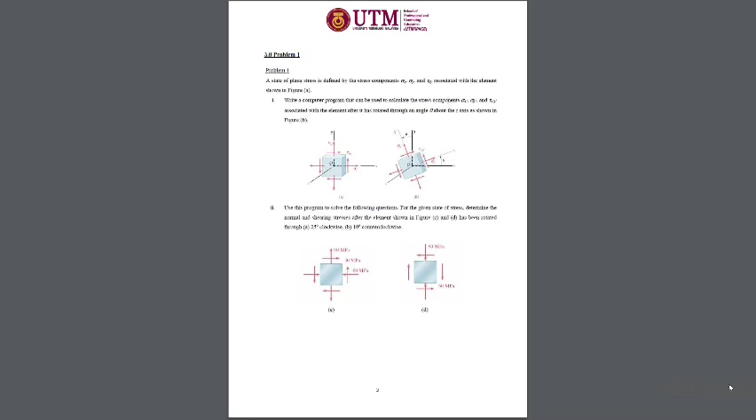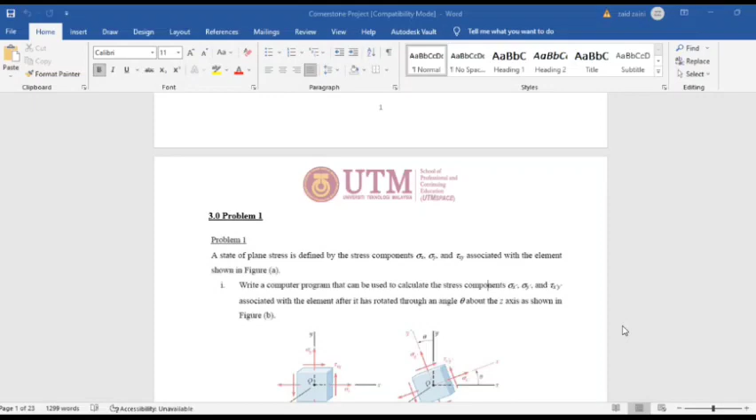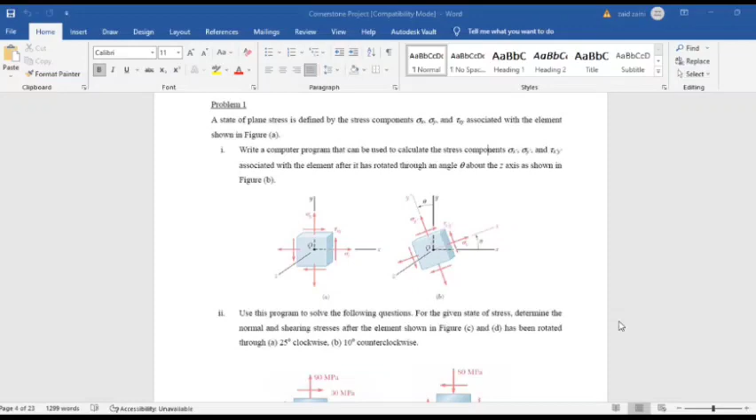Today I would like to present my part on the Cornerstone project in Mechanics of Solids 2. So my part is problem 1. The question is to write a computer program that can be used to calculate the stress components. So I used Octave to write a computer program. And the question is to use this program to solve the following question. This question gives the state of stress and angle. So I will show you how it is done on Octave.

So this is my programming. Let's run the program. Input the value of sigma x. Based on the question, sigma x is negative 60, sigma y 90, and the shear stress is 30. So just put negative 60, and sigma y 90, and the shear stress is 30, and the angle 25 clockwise. So 25 clockwise is the same as negative 25. So that is the answer.

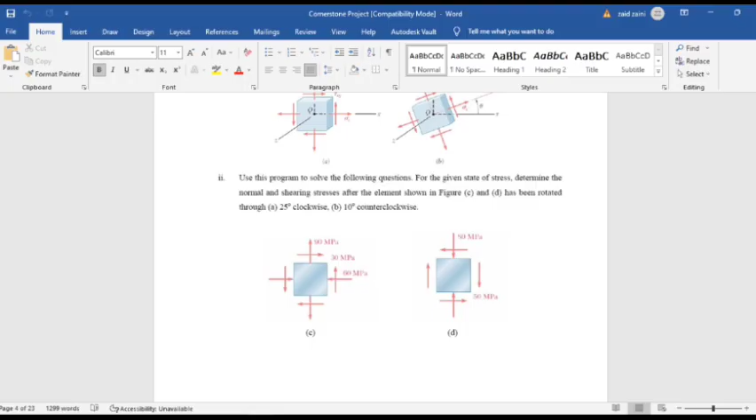I would like to show you a comparison with my manual calculation. Based on my manual calculation, I got negative 56.19 MPa for sigma, and the shear stress is negative 38. So if we compare to Octave, it's got the same answer. Let's continue to the second question. Sigma x is 0, sigma y is negative 80, and the shear stress is negative 50. Let's take a look.

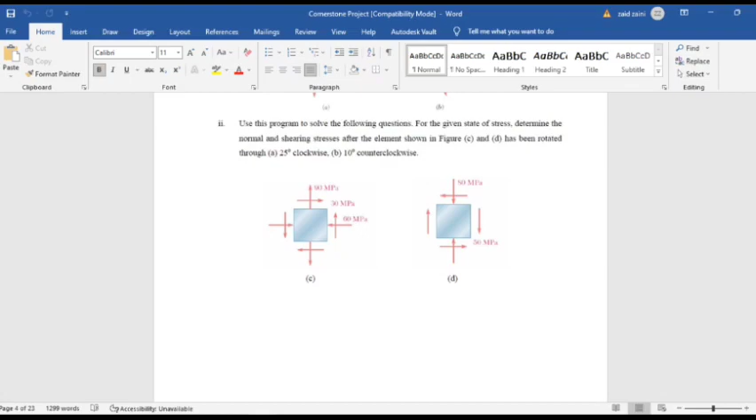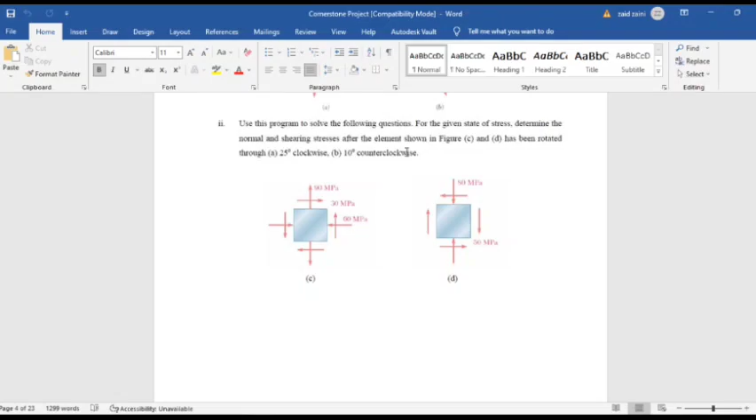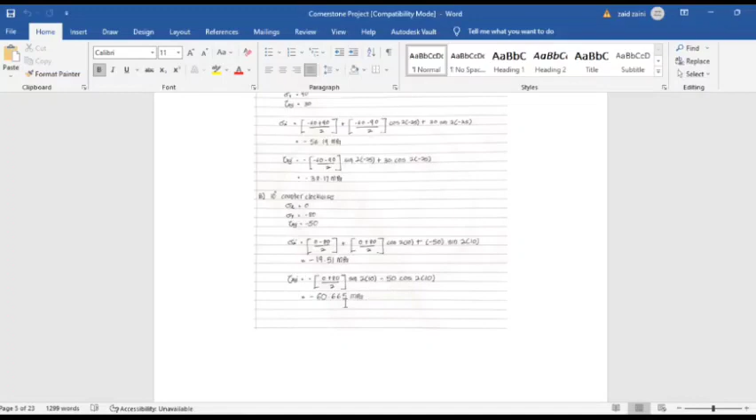So I run. Sigma x is 0, sigma y negative 80, and the shear stress is negative 50. Just put it, and the input is 10 degrees, so positive 10 degrees. And the answer is normal stress and shear stress. If we compare to my manual calculation, my manual calculation got negative 19.51 and negative 60.665. So let's take a look. Okay, so it's got the same answer.

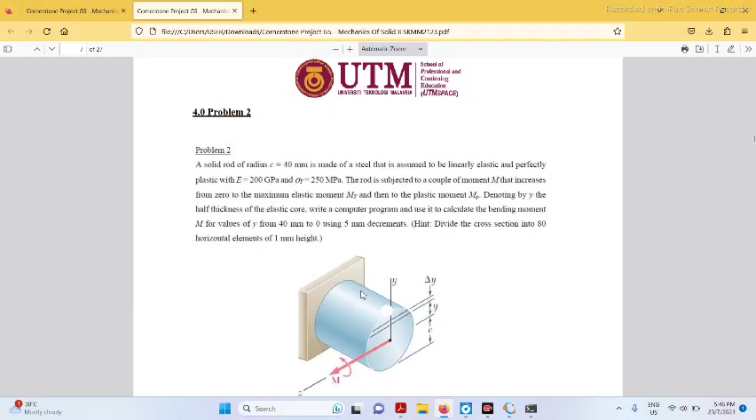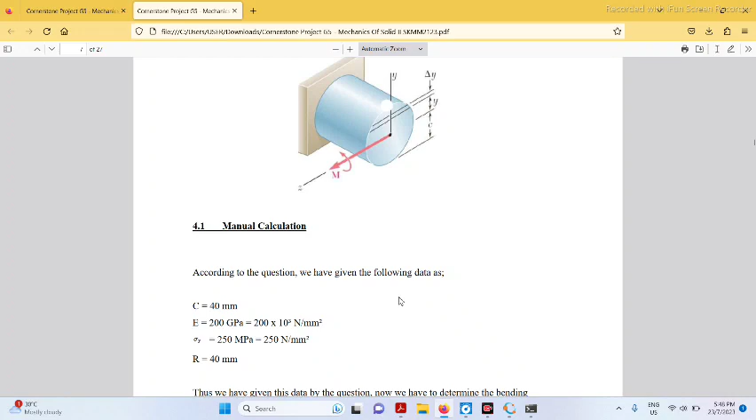Today I will present the Cornerstone project for Mechanics of Solids 2. I will solve problem 2, where this is the question and this is the picture. According to the question, we are given the following data: C equal to 40 mm, E 200 GPa, bending stress 250 MPa, R 40 mm. Thus, we are given this data by the question.

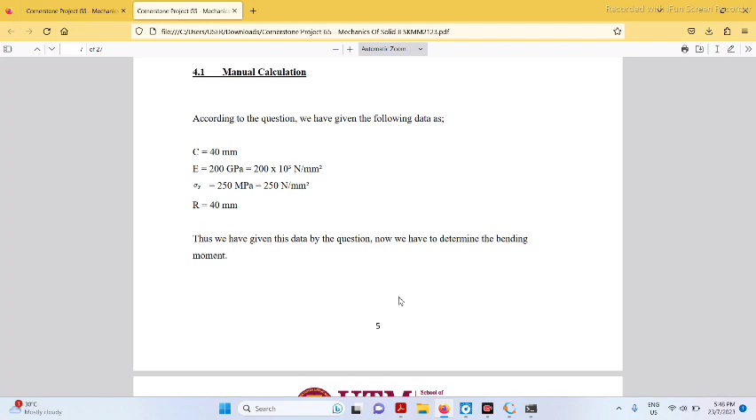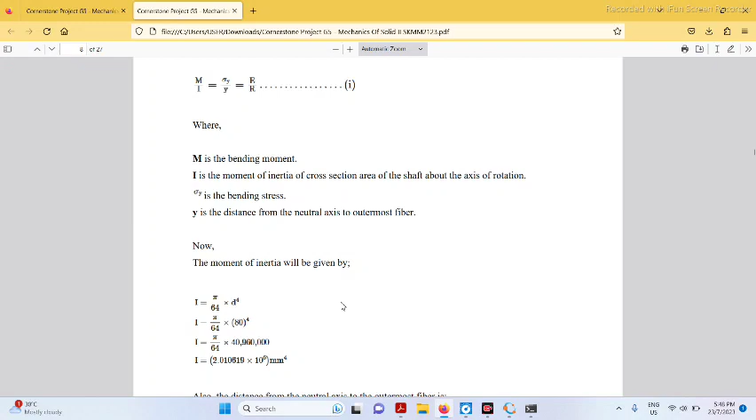Now we have to determine the bending moment, where the equation is M over I equal to bending stress over y equal to E over R. So we find the moment of inertia, where I we get 2.010619 times 10 to the power of 6.

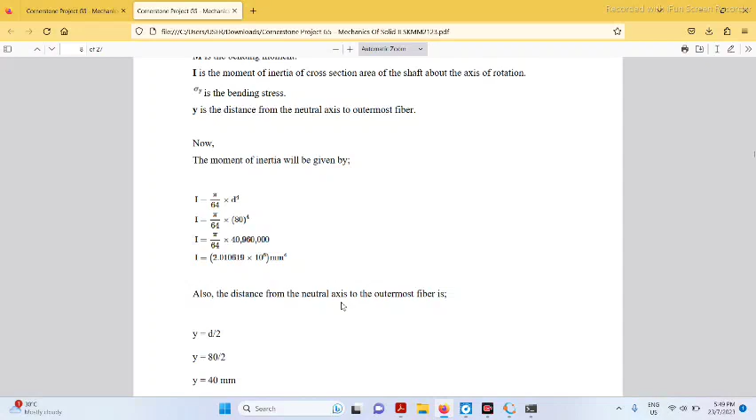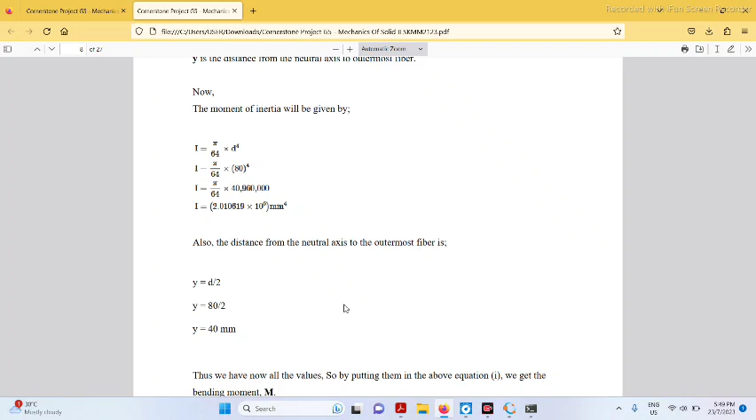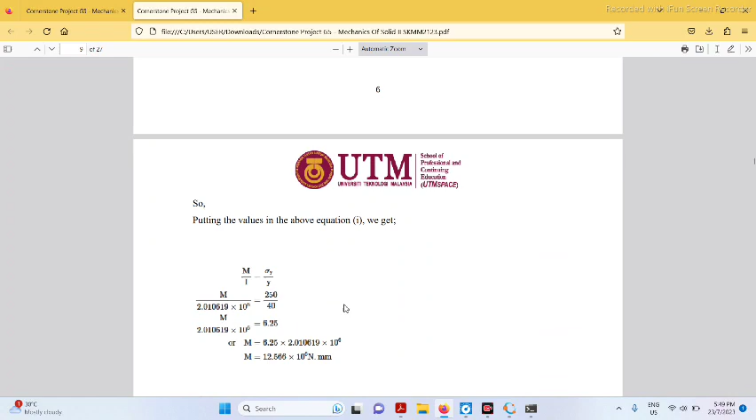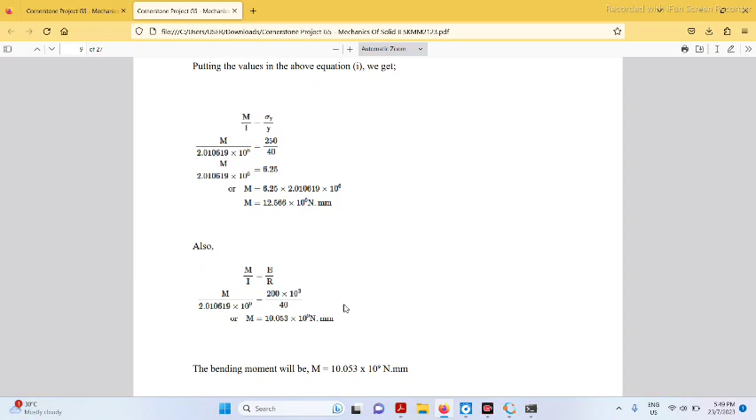Also, the distance from neutral axis y equals 80 divided by 2, so we get 40 mm. Now we have all the values, so we put them into the above equation 1, so we can get the bending moment M. So we get M about 12.566 times 10 to the power of 6, and we also get M equal to 10.053 times 10 to the power of 9. So the bending moment will be M equal to 10.053 times 10 to the power of 9.

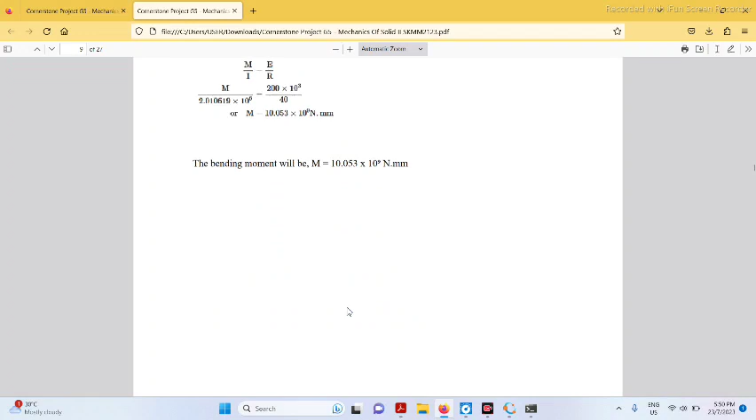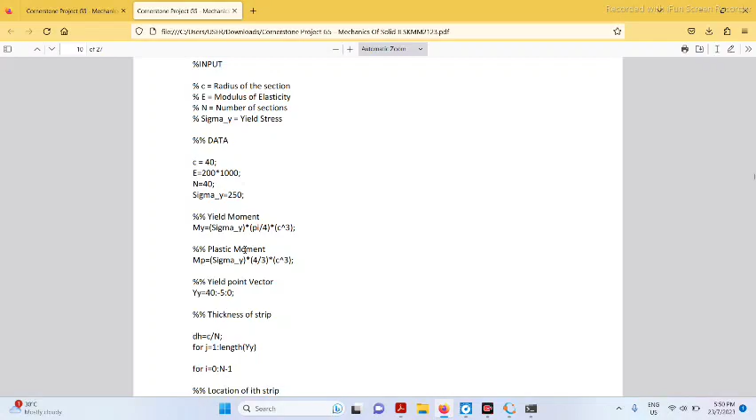So we will transfer the data into Octave programming code. So this is the coding. This is the result. So from this Octave file, we can get the result. So we put all the input data in this Octave program, then we calculate it, so we get all the data, all the answers from this equation.

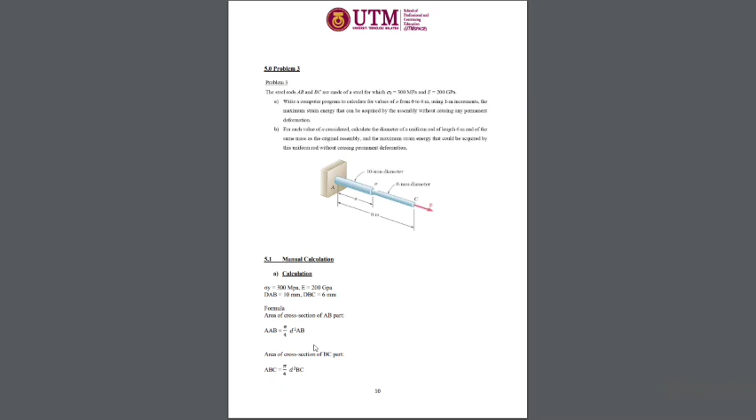Here is problem 3. The steel rods AB and BC are made of a steel for which sigma yield is 300 megapascal and E equals 200 gigapascal. And this is the question. The steel rod has a length of 6 meters and 10 mm diameter, and the smaller one is 6 mm diameter. And there is load P given. And from manual calculation, we use the formula, we find the maximum allowable force that will not cause permanent deformation.